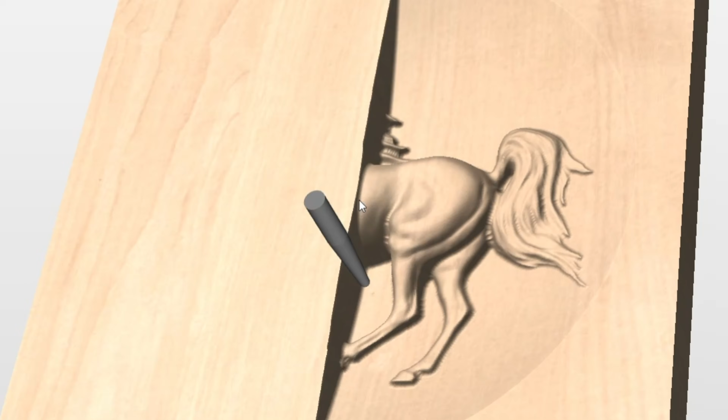If you've been wanting to try 3D carvings on your CNC but felt a little intimidated, this video is for you. We'll be walking through the material selection, the bit selection, and exactly how to program it on VCarve Pro or Aspire, step by step. So by the end of this video, you'll know exactly how to do your first 3D carving and you'll no longer be intimidated. Let's go.

So in order to successfully do any 3D carves or 3D relief carves, you need to get 4 things right: material selection, bit selection, programming, and actually the running of the CNC machine. So the very first thing is material selection, and this one's the easiest. For me personally, you need to find a dense, tight wood, and so I like things like maple, cherry, walnut. Woods like this are going to show a lot of the detail. They're not going to compress too much and going to give you a really high quality carving.

Other stuff like sapele is also a good option. Any kind of mahoganies, those are going to work good for you. I would avoid softwoods like pine or cedar because what happens during the carving is that since these lines are so far apart, you're going to get 1, some fuzzies, and 2, you're not going to see a ton of detail if you are trying to do an intricate carving like this eagle right here. And since these do take quite a while on the CNC, might as well get some nicer wood like that walnut or this maple. So for this carving, we'll be using hard maple because this is going to show you really good detail in the carving.

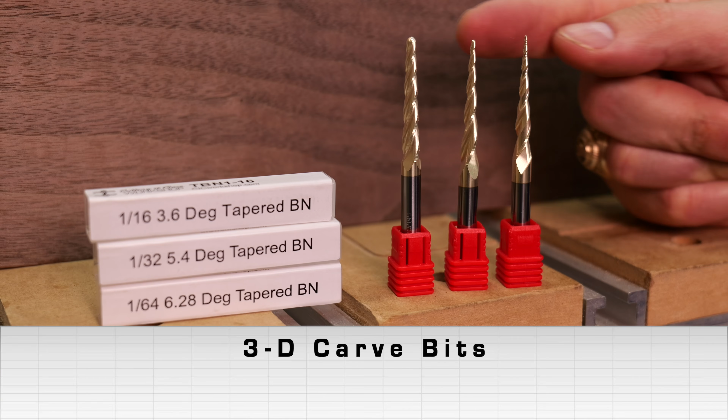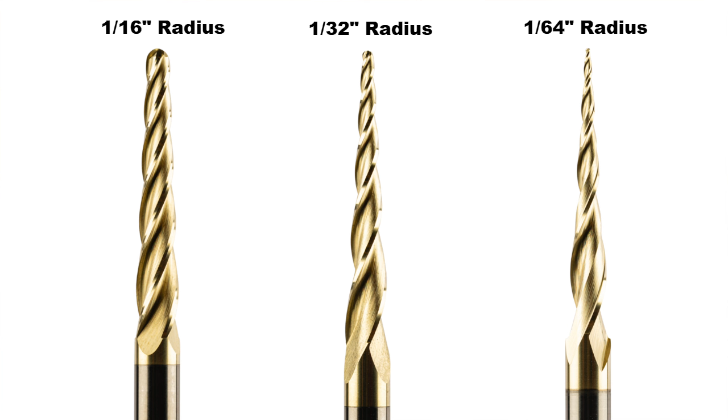The second thing you'll need is the correct bits. Now for most 3D carvings, you'll be using one of 3 tapered ball nose bits. And so these are bits that start with a larger diameter shank and then taper down to a ball nose, hence the term tapered ball nose. Now each one of these has varying diameters, and each time you decrease the diameter of the bit, your cut time is going to increase, but your detail is also going to increase. And this is something I'll show you later in the programming side. Just understand you'll be using some version of a tapered ball nose bit.

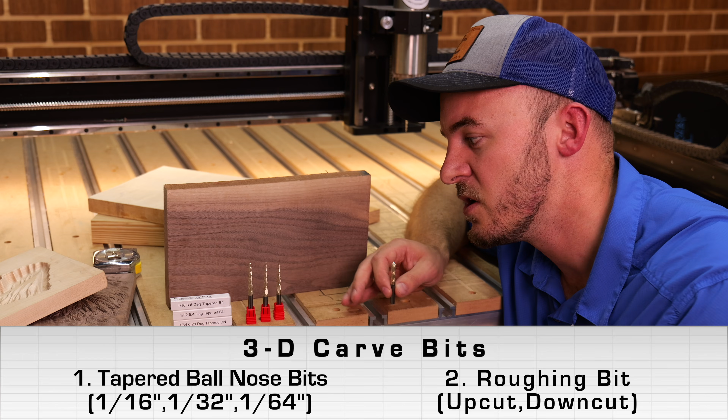The next thing you'll need is some type of a bit to clear out material. So we'll be using this Golden Boy rougher today, but any upcut or downcut bit is going to work just fine. So as long as you have one of these and one of these, you're set and ready to go. Now, let's head on over to the programming.

The modeling software we're using today is going to be VCarve Pro version 12, but if you are using an earlier version like VCarve Pro version 11 or even Aspire version 11 or 12, all of this is going to work exactly the same. Now, when setting up a job for a 3D model, it's really important that you try to get the height and the width as close to the carving size as possible, because the size of the job does affect the modeling resolution.

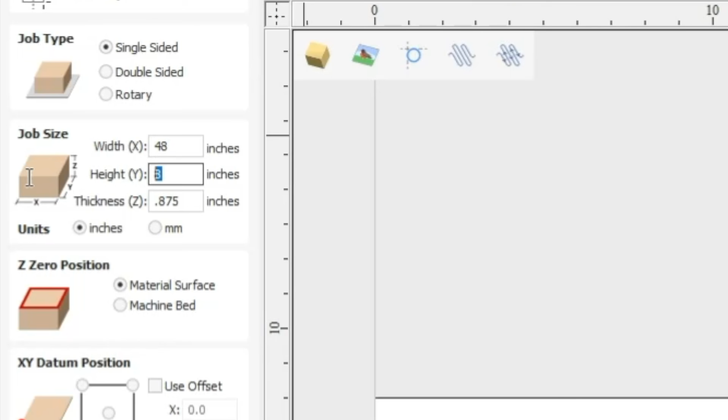So what I mean by that is if you look at this modeling resolution right here, it says it's going to do 1,000,000 points. And that is 1,000,000 points across the size of your job. And so if your carving is really small, but you make this a massive job, then your 1,000,000 points are going to be really spread out, if that makes sense. And so we're going to keep it tight. And then you can also adjust the modeling resolution for high, very high, depending on your job size. But for a small carve like this, just do a standard modeling resolution. That's going to be fine. And we'll be using a center origin today.

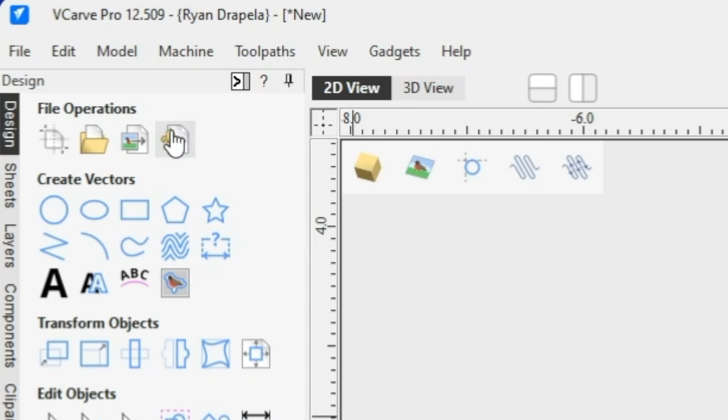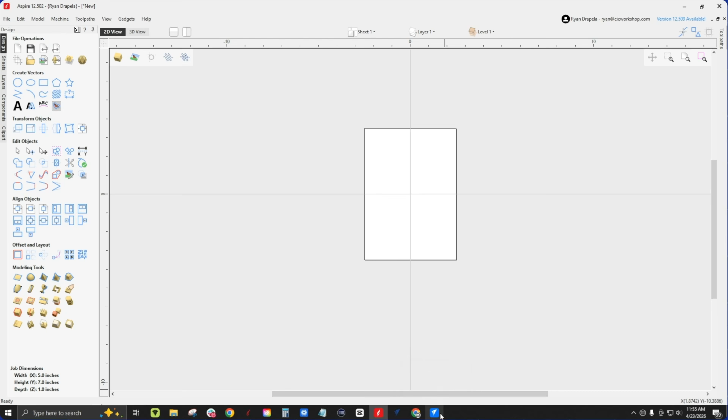Now to get our 3D model in here, there's a few different ways to do it. We can import a 3D model, or we can just use the clip art that is provided with Vectric. And so this is the way we're going to be doing it today. Now on VCarve Pro, you can't really actually model too much of your own stuff. That's going to be more on the Aspire side, but you will have to pay for that, and it's really hard. But if you are that good, you can definitely do it. So today, for simplicity's sake, we're just going to import some clip art that is already preloaded and comes with VCarve Pro. And so I want to do an animal like I showed you guys earlier, and I want to do this horse that has a dish behind it.

So I simply just double click it and it's going to come to the center, or I can drag. So there's a couple different ways to do it, all of which are relatively simple. Now, once we have this model in here, I'm going to switch views so y'all can see it in both the 3D version and the 2D version.

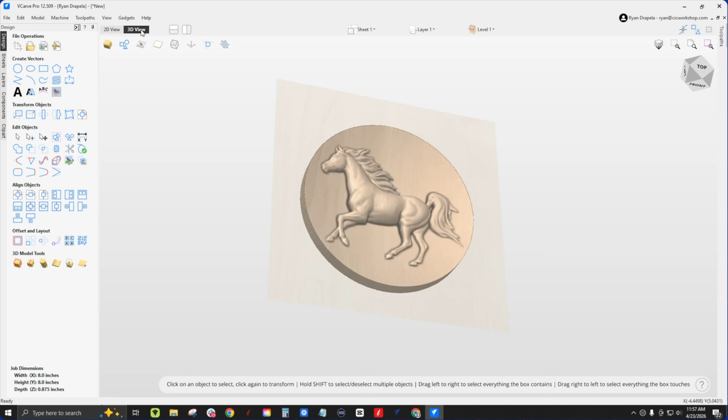So right now we're looking at the 2D version, and on the 3D version, you can actually see what this horse looks like just by clicking up here at the tab. And so in order to see both, I'm actually going to split the views up like this so we can see both the 2D version and the 3D version on the same exact screen.

Now, the first thing we want to do is adjust the size of the 3D carving to our needs. And there's a couple ways to do this. Way number one is coming over here to the transform selected object size. And we can just click that button. And let's just say we want to make this 7 inches. And you click apply and it's going to make it 7 inches. Now that's how to do it in the 2D version.

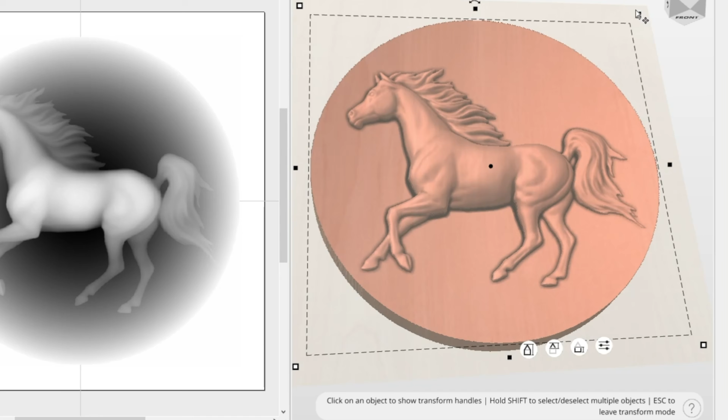In the 3D version, you can come over here and you can actually type in exactly what you want. And of course, you always have the option to scale it up or down on either the 2D or the 3D modeling side. So for me, in my simple jack self, I'm just going to use the selected object size and we're going to keep it right at 7 inches. And we're going to make sure it's centered in the exact center of our object by pushing F9.

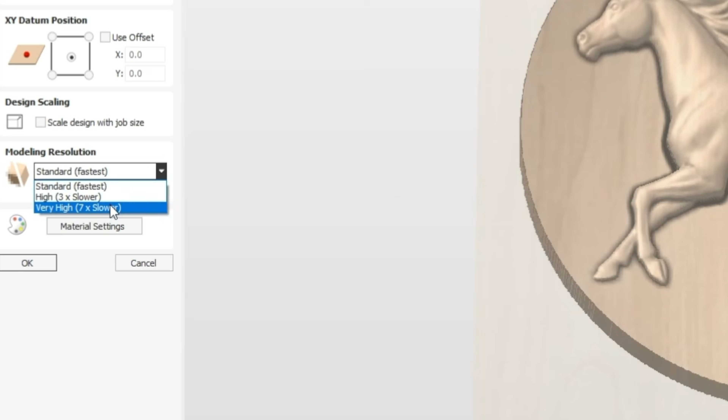So now that we have the correct size, I'll show you what I meant by modeling resolution. So if we make this big and you zoom into it, you can see all of these tiny little squares right there. And those are all the pixels that are making up your 3D project. And so if we were to change that modeling resolution to even more pixels, you're going to see a huge change in the overall modeling quality of this horse.

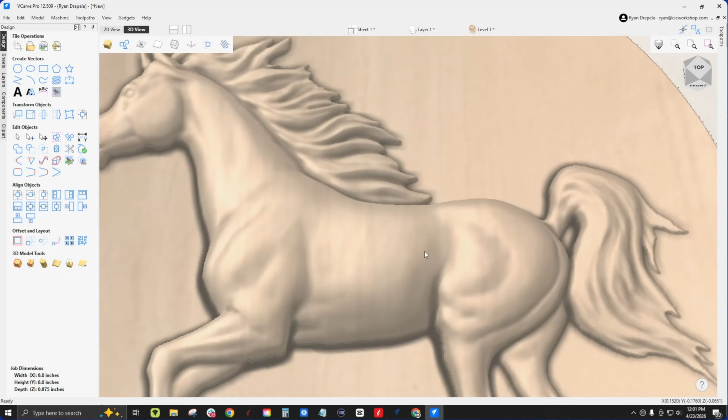And so it adds a whole bunch more squares. But for something like this, I don't really think we need a super high modeling resolution. You're going to get the same exact results either way. It looks a little fuzzier, but it's going to get carved out just fine. So the next thing we want to do is adjust the height of this. So if you look from the side, we are going to determine how thick this is.

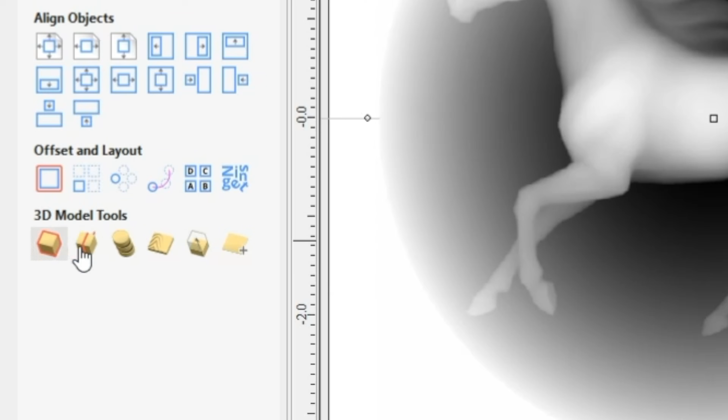Now there's also 2 ways of doing this. The one way is on the 3D modeling tabs on the left side in your design tabs. And that's going to be right over here in the scale Z height of the model. And so if we click that, we can simply just adjust the height up or down on this slider bar and make it super deep or not so deep. And you have a very thin dish, just like that.

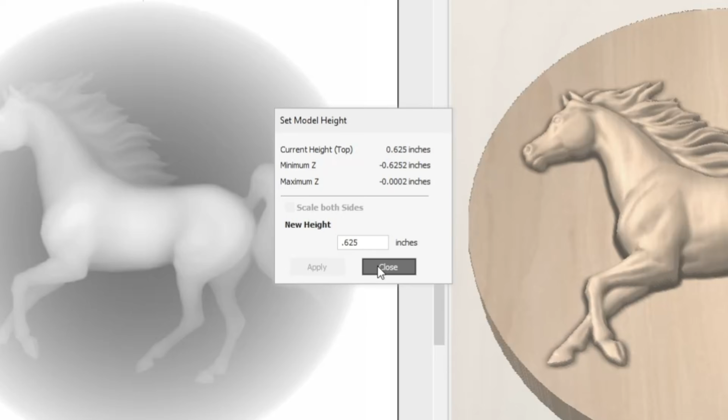I like to do the set exact height button. And so we're going to click that. And because this material is 7/8 of an inch thick, so 0.875, I'm going to leave a 1/4 inch on the back of it. And so we're going to come in at 5/8 of an inch. So I'll click that, close, hit OK. And now we have the adjusted size of our 3D carving.

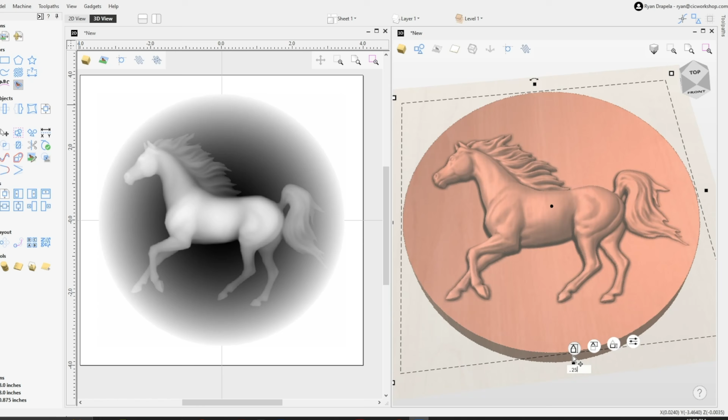Now, another way to do it is to actually click on the 3D modeling side, and you can adjust it over here with these 3 buttons. And so I want to adjust the overall model size. So I'll just simply click that. And if I want to go to 1/4 of an inch, I'll type that in, hit enter, and it adjusts it right there on the 3D modeling side. But for now, we'll keep it 5/8 of an inch.

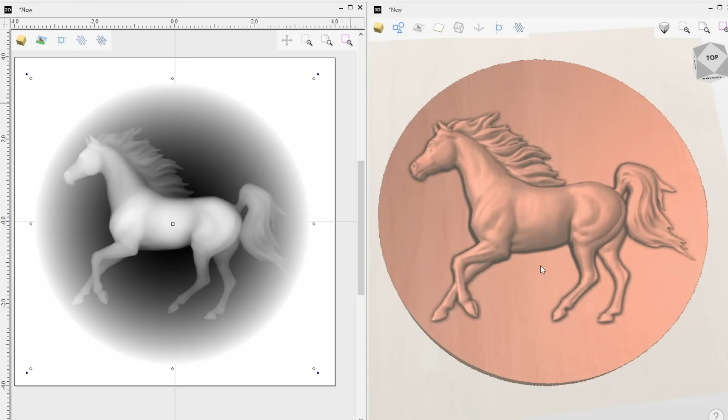So as far as messing around with your 3D model on the design tab, that's about as complicated as it gets for what we're going to be doing today. You simply just scale it up or down and make it thicker or thinner. Like, that's really it. Not going to try to overcomplicate this.

So the 2 toolpaths to cut out this horse are going to be the 3D roughing and the 3D finishing toolpaths. That's the 2 we're going to use. So the first thing we have to do is the 3D roughing toolpath. And let me quickly hit calculate right here so you can see exactly what it's going to do. Then I'll explain why it's doing it.

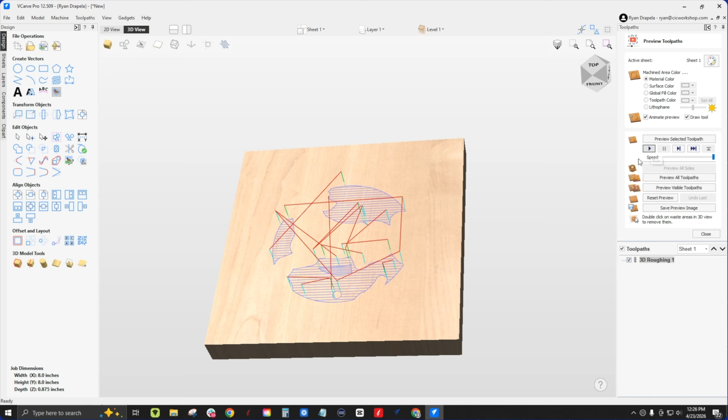So right here, as you can see, this rougher is removing the bulk of the material. Therefore, the finisher can actually go back by and remove the rest of the material to give you this finished looking horse. So there's a couple different things in this roughing toolpath that we can adjust.

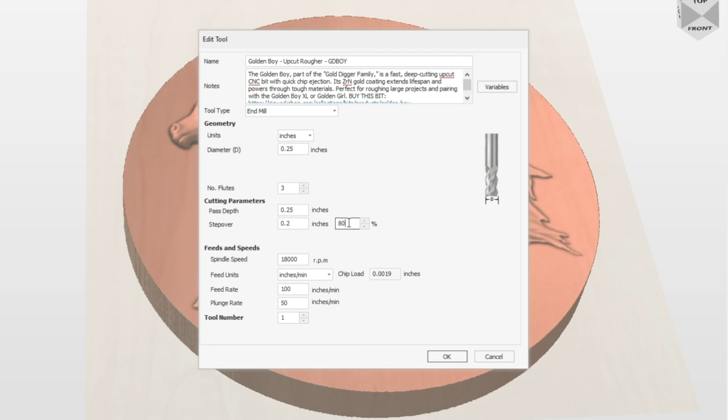First off, the bit I am going to be using is the Golden Boy Upcut Rougher. And that's simply a 1/4 inch bit. And I have it going at 100 inches a minute and 50 on the plunge rate. And if your CNC can handle it, I do advise actually increasing the step over because this is never going to get seen. It's just going to take up some time.

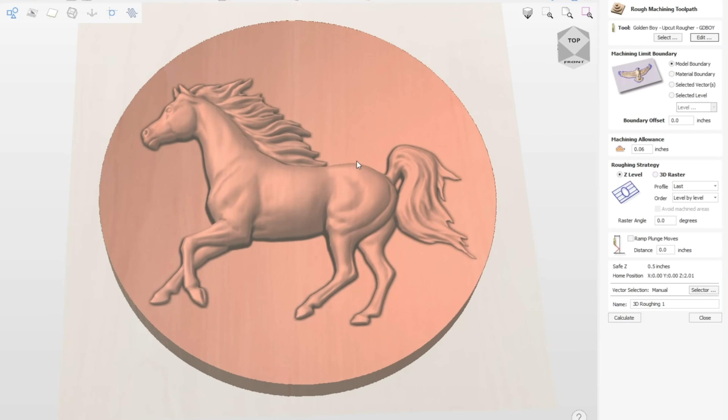Now the pass depth does matter on this 3D roughing toolpath. And so we're going to set that to 0.25 inches. The next thing you're going to see is the machining limit boundary. And there's a couple different ways to select what this rougher is going to machine out. And so the model boundary, if you select this one, it's only going to machine the circle of your model.

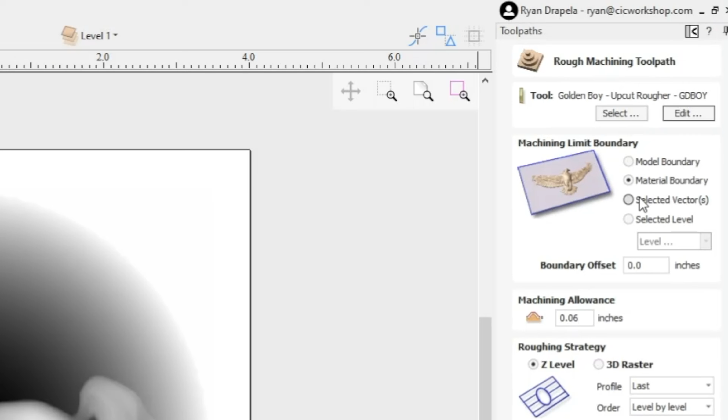If you select material boundary, it's going to do everything that's in your job setup. That's why earlier I said it's important to keep the job setup tight on your 3D carving, because if you do select material boundary, it can take a really long time if you don't have the selected job set up correctly. And the next one is going to be your selected vector.

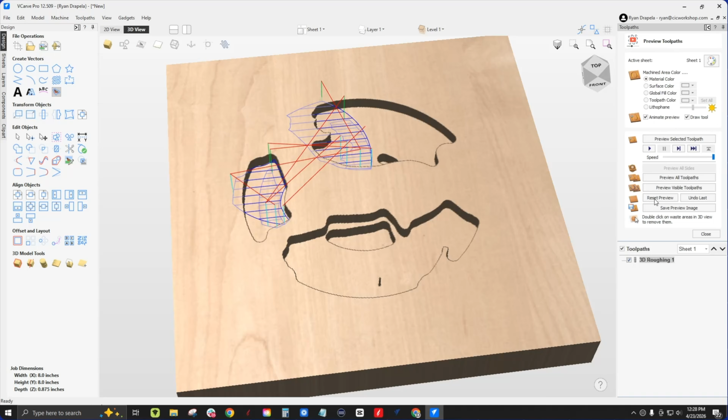So let's just say, for instance, you only wanted to carve out this part of the horse. And so all you'd simply do there is select the selected vector button, select the vector and your model, and click calculate. And as you can see, it's only going to pocket out whatever is inside of that circle that you have on the 3D side. So for this carving, we're not going to do the selected vector. We're going to be selecting the model boundary. Now there are different uses and functions for these, but that's for a different time and a different video.

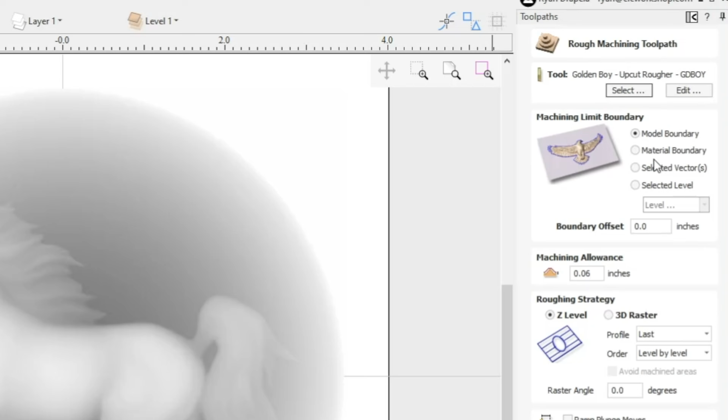Now, this machining allowance right here, I like to have it at 0.06 inches. And this is the amount of material it leaves for the next toolpath, the finishing toolpath, to take off. And so it's really important to leave some amount of material for two different reasons. One, it's so that finishing bit can actually have a little bit of material to eat, right? And actually have a correct chip. The other reason is if you're off on your Z height a little bit, you won't actually see the lines from the roughing bit. So I like to keep that at 0.06 inches.

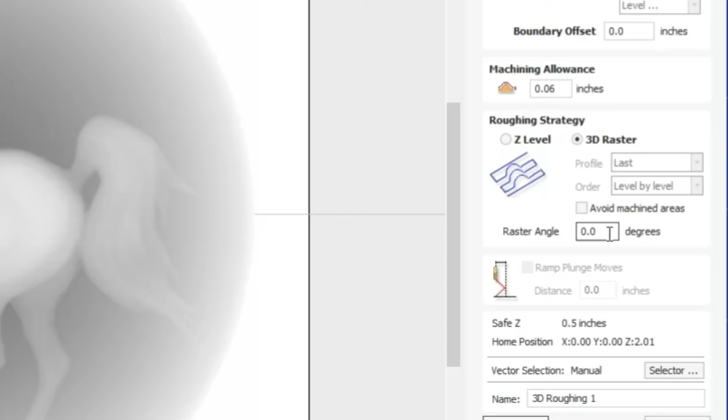The next thing is how we rough it out. We have the Z level strategy and the 3D raster strategy. So first, let me show you this 3D raster strategy. And we're going to use a raster angle of 90 degrees. Because our grain is vertical, we want it to be at a 90-degree angle so that the roughing part goes with the grain of the wood. Really, it's not that big of a deal if you go at 0 degrees or 45 degrees, but for this, I'm just going to go at 90 degrees. So let's be sure we have the model boundary machining limit selected and hit calculate.

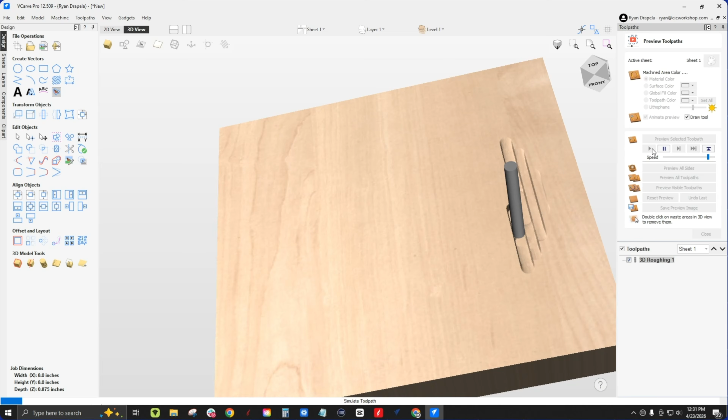Now, what this is going to do is it's going to treat that rougher as a finishing bit. And what you're going to see is that the rougher goes up and down just like that finishing bit is going to have to do later. And this way works, but I have learned it just takes a long time and it's really not necessary from my experience. So I personally do not like the 3D raster method, but now you know what it is. I prefer the Z level method.

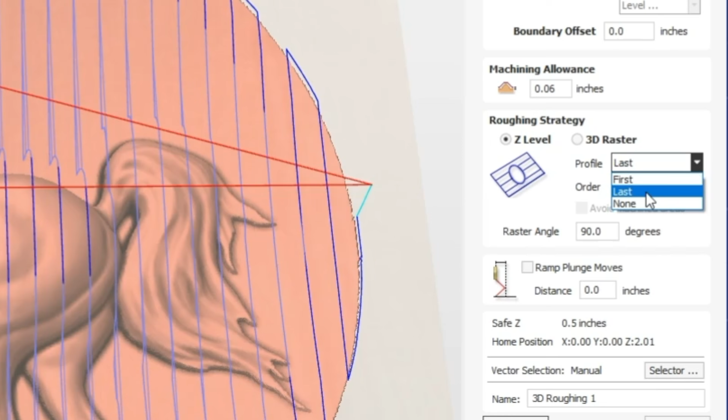And so what we're going to do on the Z level method is that it's going to pocket down all the areas that it needs to do level by level. And I'm going to run a profile pass last. Now, if you do want to save some time, you can select none. I haven't had a problem either way, so it doesn't really matter in all honesty. But for this, we're going to select last.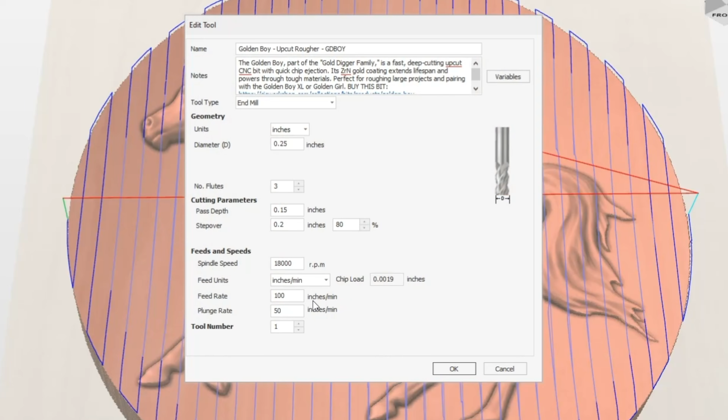Now we're going to keep that 90-degree raster angle and we're going to have a slight plunge. Now keep in mind, we're using this roughing bit, so we're only running it at 100 inches a minute, but I have run it much faster in the past. So simply hit calculate. It's going to give us this little flag. Click OK.

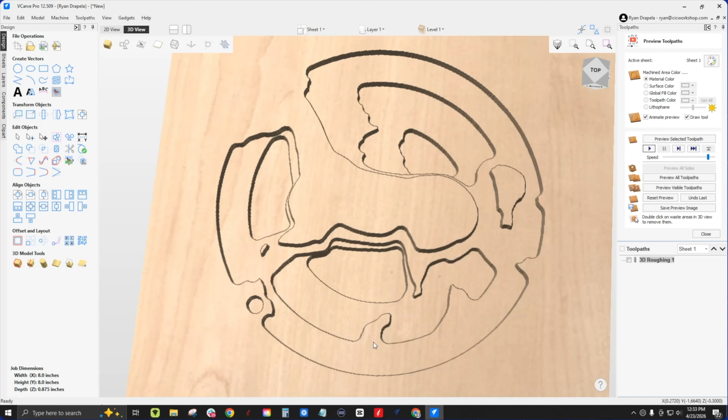We'll view it, and you can see the difference between both of those roughing toolpaths. Now, believe it or not, you'll still get the same result on the finish no matter the strategy. And the other one took 16 minutes, and this one takes 5 minutes. So a huge difference in time on the roughing strategy.

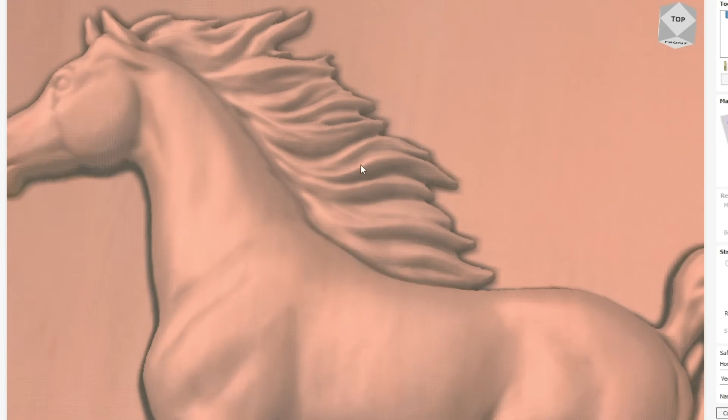Now, the finishing toolpath is where the overall quality and the overall time it takes on your CNC really comes into play. So for this horse, we do have an ample amount of detail, so we'll be using the tapered ball nose bit. Now, which tapered ball nose bit? We don't know yet until we run some models. And so over here, we're going to select one of the 3 tapered ball nose bits that CNC Workshop offers.

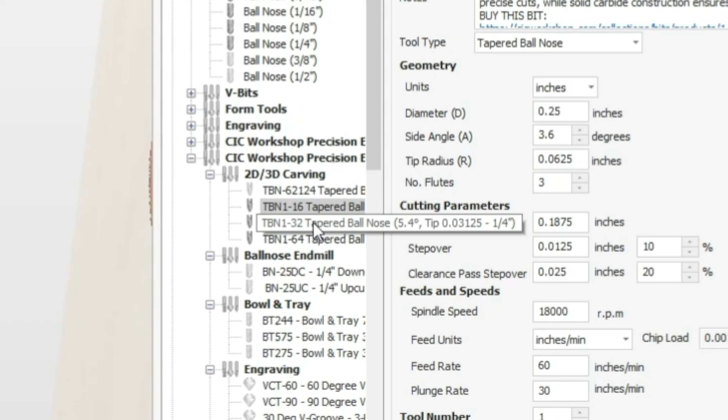One of these is a pretty thick one, and that's going to be a 1/16 radius tapered ball nose, then we're going to slowly go down the list and figure out which bit we want to choose. So first up is that 1/16 tapered ball nose. And we definitely don't want to use both, and so we're going to remove that other bit.

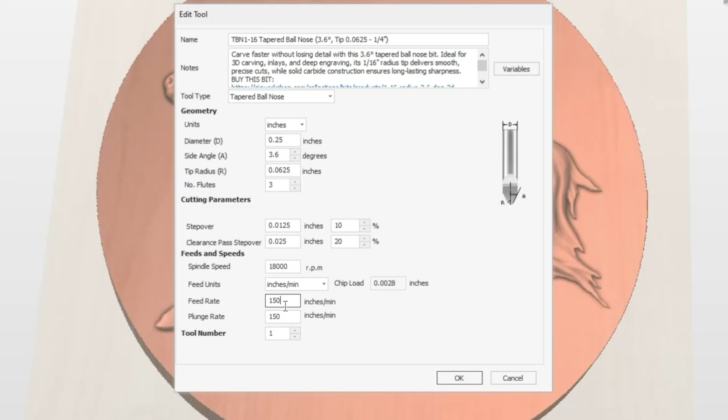Now, as far as feeds and speeds go, I personally like running these at around 150 inches a minute because my Shapeoko can handle it. But if you need to run slower, definitely do that. But I will say keep the feed rate and the plunge rate exactly the same.

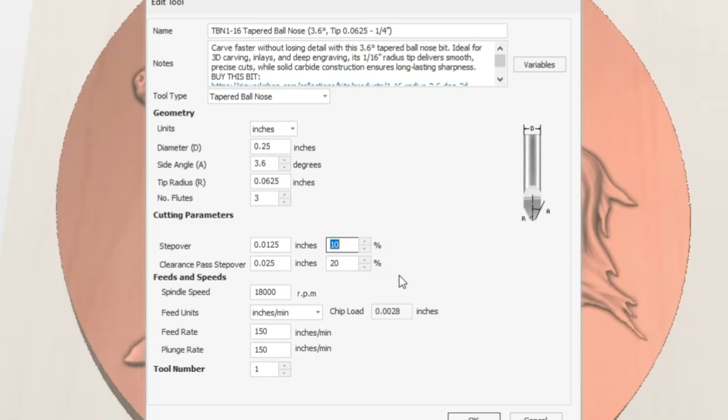Now, as far as step over goes, a common range for 3D carvings is going to be 8% up to 12% step over. So for this carving, we're going to run at a 10% step over. And that is how much your bit is moving over and how many little waves you may or may not see in the carving.

Now we're going to select the same machining boundary that we did on the roughing toolpath, and that's going to be the model boundary. Now, since we did not have a boundary offset in the roughing toolpath, we're going to keep this at 0.

And what that boundary offset is, it'll just carve a little extra on the outside of your carving. And so if you were to set this at 1 inch, it's just going to go 1 inch over and do 1 inch all the way on the outside of the carving. And for this particular carving, we really don't need that because it's a dish in the middle of the wood. So no real boundary offset needed.

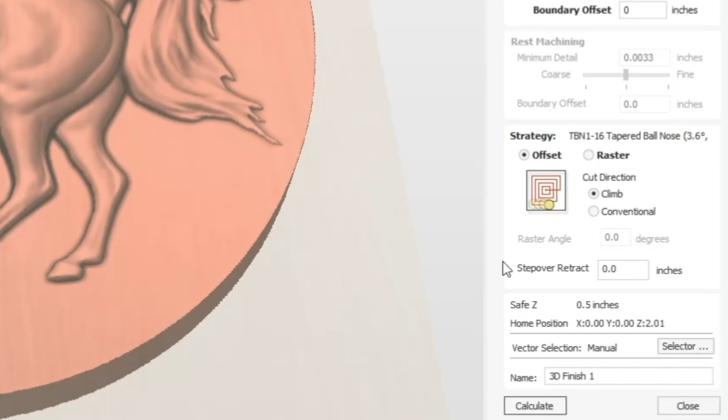Now, the next thing we need to look at is offset versus raster. And so I'll do this first one in offset, and then I'll show you that raster. So we'll simply hit calculate. And these typically take a while to calculate because there are so many lines. And so if we were to decrease that step over, let's say down to 8%, you would have a ton more lines in here, and it would take about 20% longer on the overall time.

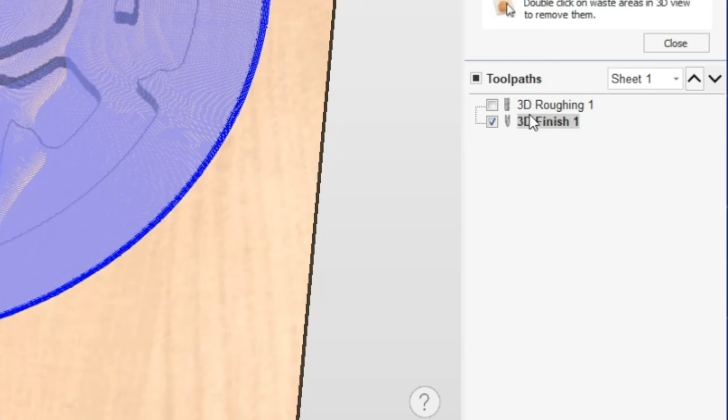And so that 3D roughing toolpath took 5 minutes, and this 3D finishing toolpath is going to take 42 minutes. Now, see how that bit started in the center and went outward? That's because we had an offset toolpath selected.

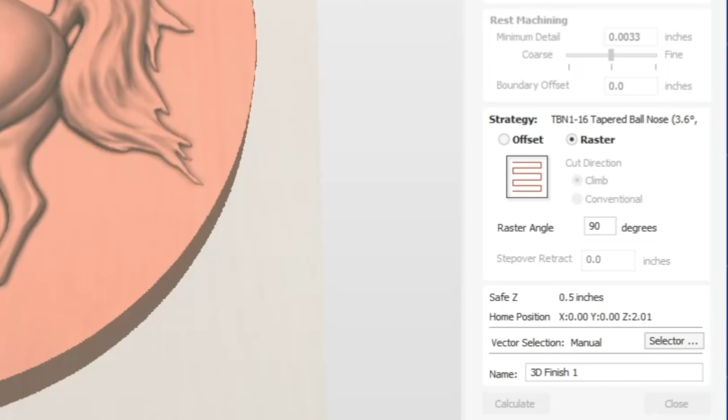Now, me personally, I like to do a raster going with the grain, just like I did on the rougher. And so I'm going to do a raster with a 90-degree angle, and that's going to make that bit go vertical instead of around and around. And the reason I do that is just, I don't like the bit cutting across the grain of the wood, but that's just my personal preference. So now if we look at it going, it's going to go vertical just like that.

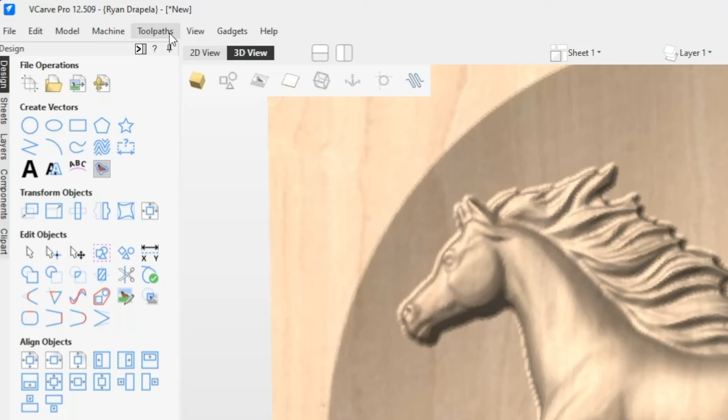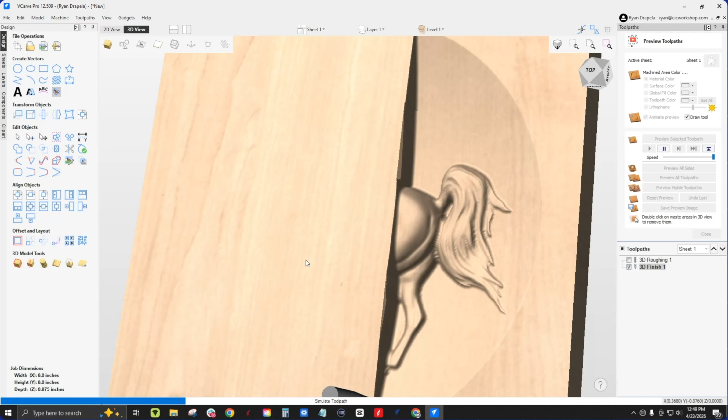Now, one little trick to do if this modeling resolution isn't good for you is to actually go up to the Toolpaths tab, and then you can actually adjust the simulation quality right here. And so let's just say we want to select very high. We're going to click that. And now when we view it, it may take a little bit longer, but you're going to get a lot more definition, and you're going to see exactly what that bit is going to show throughout this model. But it's definitely a heck of a lot slower.

So you can definitely see some of the marks left by that 1/16 radius tapered ball nose. Now, in a previous video, I put the 1/16, the 1/32, and the 1/64 radius tapered ball nose head to head. And each time I decreased the radius of the tapered ball nose bit, the time doubled, but the quality did increase. So here's a photo showing each bit in detail of what you can expect on roughly a 5-inch by 7-inch carving. So now let me put in the 1/32 tapered ball nose so I can show you the difference in time on both of these bits.

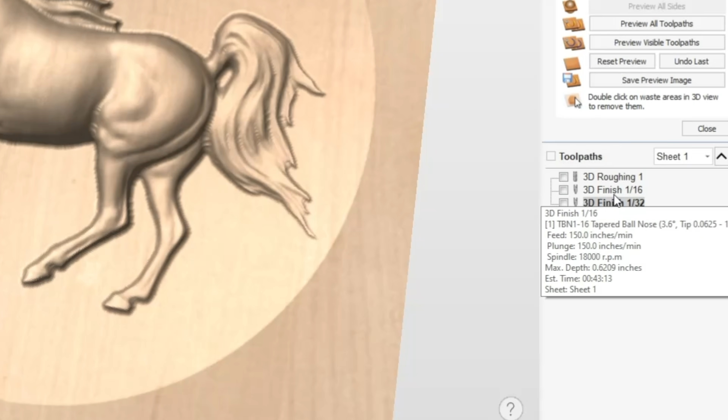So we simply select that, and I'm gonna go back and make sure that my feed rate is exactly the same. Now, why I'm spending so much time on this is because it is literally the biggest factor in the overall outcome of your 3D carving and the overall quality and the time. So let's look at the 1/32 tapered ball nose versus the 1/16 tapered ball nose. Now do notice the 1/16 takes 43 minutes, but the 1/32 is going to take an hour and 26 minutes. So like I said, when you decrease the diameter of that bit, you are going to double the time. But let's see how that affects quality.

So you can definitely see a lot more detail and a lot less lines made by that tapered ball nose bit, but it does definitely increase the time. Now me personally, I like this horse a lot better than the 1/16 tapered ball nose horse, so I'll be using the 1/32 for today's carve.

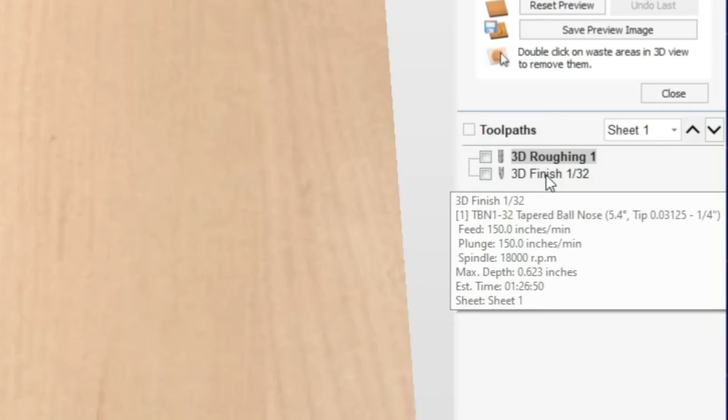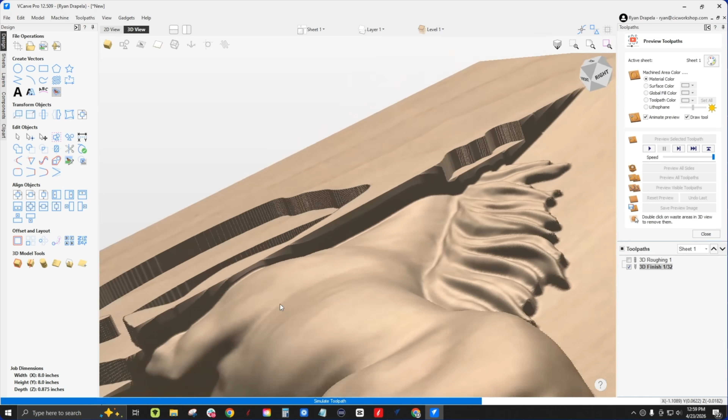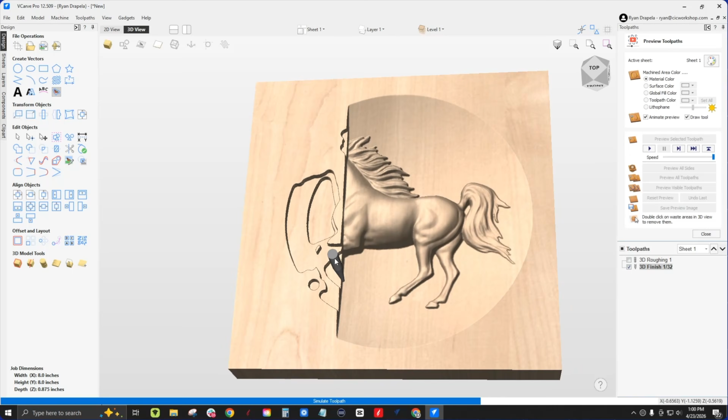So now that we know we're using that 1/32 tapered ball nose, we can preview our full toolpath here. So first we have it roughing out with that roughing bit level by level. Next, we're coming back with that 1/32 tapered ball nose to do all of that detail work. If I pause it right here, you can definitely see how much material that finishing bit is eating. And that's why I like going 0.15 inches on that roughing toolpath, because if this is too thick and let's say it's way up here, it may snap the very tip of that bit. But overall, that horse is going to look good. 150 inches a minute is going to be just fine, and 10% step over is going to be just fine. So that's how it's going to look. Let's go cut it out.

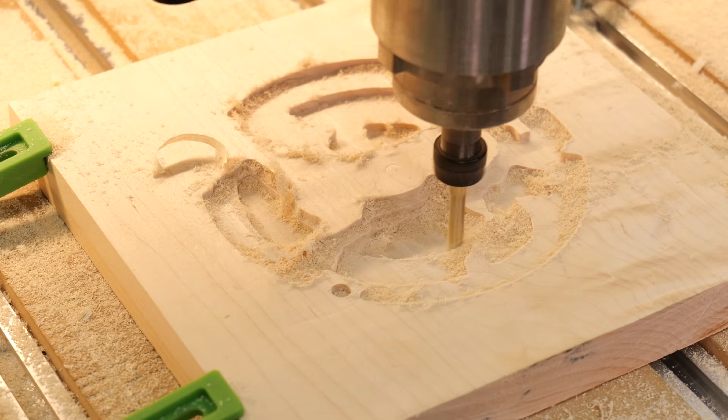So now we're at the CNC, our maple is held down, we have our center origin marked. First up is the roughing bit to clear away all that material. I'm gonna chalk it up and we'll hit go. Let's do it. So the rougher just got finished clearing out this material.

Time to put this 1/32 radius tapered ball nose in the CNC, and make sure when you put it in there, you do not reset your XY0. Do not reset that. The only thing you need to do is touch off to the top of the material and reset your Z height. Now I'm using the Shapeoko today, so it has this automatic bit setter, so it's gonna do it for me automatically, but just be sure, never reset your XY, only reset your Z0 whenever you're doing carvings. If you don't, you'll ruin the whole thing, so don't do that.

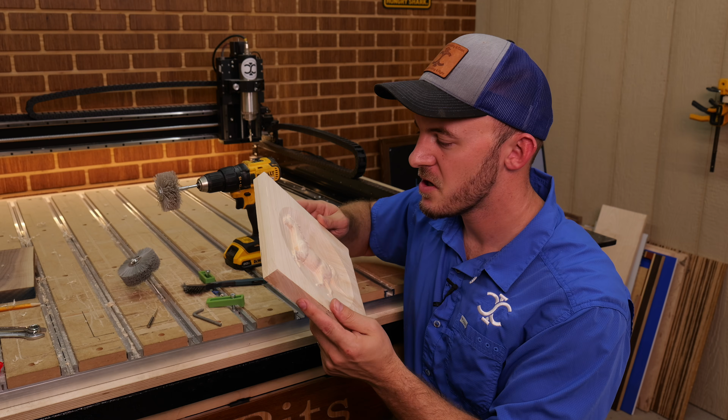So once that tapered ball nose bit is finished, your project is ready to go. All you need is a little bit of cleanup work with a wire brush and some nylon wheels, and you'll be good to go.